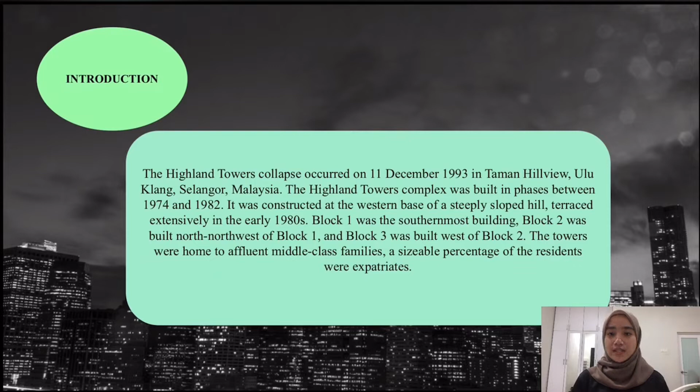On 15 October 1994, 6 residents filed a lawsuit against the developers of Highland Tower and 8 other related parties for alleged negligence. The lawsuit sought more than 1.5 million for loss of property, property damage, rental fees, and funeral expenses. The developers and architectural team were sued for constructing the building without regard for safety.

Furthermore, this has shown the challenge for an engineer to build a building firmly, as the design was made without qualification in mind and was approved by the engineers without knowledge of who designed the plan. Additionally, the construction company was found to have used substandard materials and improper welding procedures during construction.

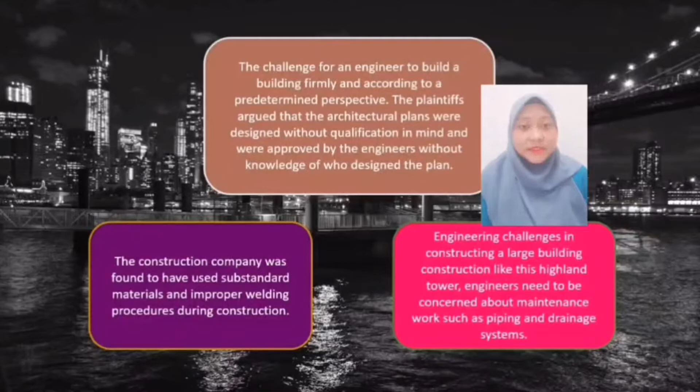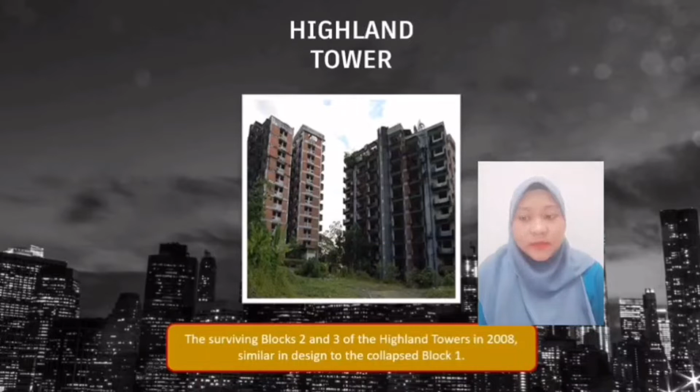Plus, as an engineering challenge in constructing a large building like Highland Tower, engineers need to be concerned about maintenance works such as piping and drainage systems. This is the picture of Highland Tower. It is the surviving Blocks 2 and 3 of the Highland Tower in 2008, similar in design to the collapsed Block 1.

The date of this landslide tragedy was 11 December 1993, which is 28 years ago. The time of the incident was 1:35 p.m., Saturday. The location is Highland Towers, Taman Hillview, Ulu Klang, Selangor, Malaysia. The landslide was caused by continuous rain for 2 weeks.

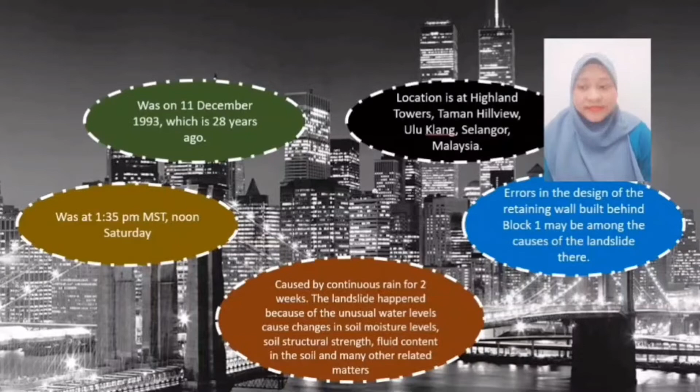Case study at Highland Tower. The surviving Blocks 2 and 3 of the Highland Tower in 2008, similar in design to the collapsed Block 1. The date of this landslide tragedy was 11 December 1993, which is 28 years ago. The time of the incident was 1:35 p.m., Saturday afternoon. The location is Highland Towers, Taman Hillview, Ulu Klang, Selangor. The landslide was caused by continuous rain for 2 weeks.

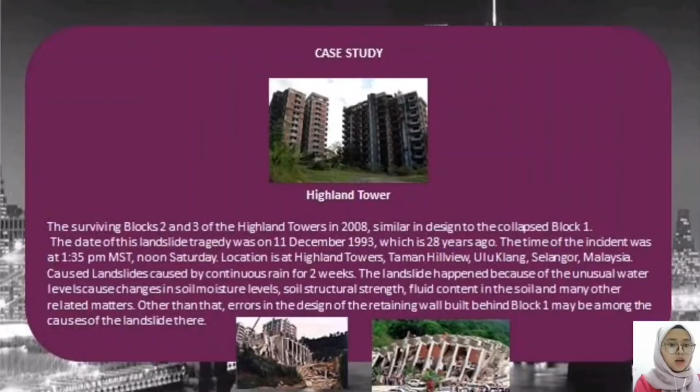The landslide happened because the unusual water level caused changes in soil moisture level, soil structural strength, fluid content in the soil, and many other related matters. Other than that, errors in the design of the retaining wall behind Block 1 may be among the causes of the landslide there. Analysis and discussion.

The monsoon season in Malaysia, namely in November and December, brings extreme heavy rains every year and can cause flash floods and landslides. Block 1 of Highland Tower collapsed after rain fell 10 days in a row, causing landslides after the retaining wall of the condominium parking lot collapsed. Unusual water levels caused changes in soil moisture levels, soil structure strength, balance of fluid content in the soil, and many other matters.

The dense equatorial rainforest fills the Titiwangsa Range with its broad leaves and roots, thus being able to accommodate and receive heavy rainfall and act as a catalyst to the soil. When there are no ground cover crops, water will seep into the soil and become a lubricant to the landslide and the building on it.

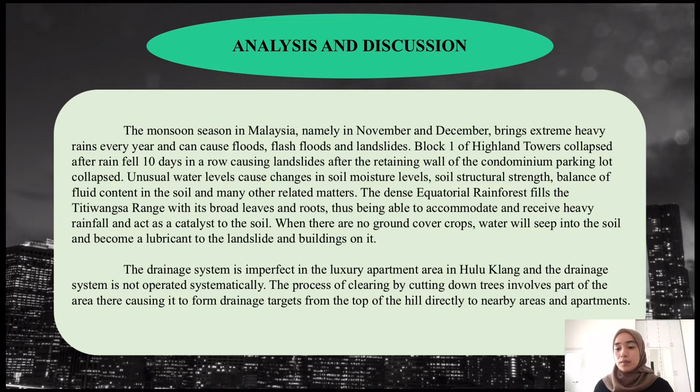The drainage system is imperfect in the luxury apartment area in Hulu Klang, and the drainage system is not operated systematically. The process of clearing by cutting down trees involves part of the area, causing it to form a drainage path from the top of the hill directly to nearby areas and apartments.

In 1992, there was video footage showing water flowing down from a hillside around the Highland Tower condominium during heavy rain. A year before the tragedy, water was pouring from the hillside toward Block C of the condominium and the ground floor of the block's parking lot was covered in mud.

Drains to carry water from sewer pipes on the hillside to the main ditch in front of the Highland Tower block were not constructed. Some people have said that their superiors did not stop the construction of the Highland Towers condominium, even though the developer failed to submit a drainage plan to drain water from the area to Sungai Ulu Klang, the master system to be built for the entire area.

The hilly topography of the area, geological conditions, and unstable soil types also encourage landslides. A geologist from a university stated the soil was not strong rock but a soil mixed with sand. These include Bukit Antarabangsa, Taman Tun Abdul Razak, Taman Hillview, and Bukit Indah. Construction of the building was brisk and there was no slope monitoring by the authorities.

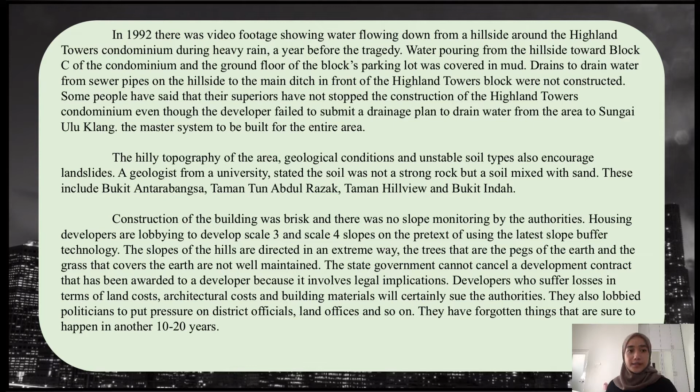The state government cannot cancel a development contract that has been awarded to a developer because it involves legal implications. Developers who suffer losses in terms of land costs, architecture costs, and building materials will certainly sue the authorities. They also lobbied politicians to put pressure on district officials, the land office, and so on. They have forgotten things that are sure to happen in another 10 to 20 years.

Furthermore, there was the approval of an allocation of 89 million ringgit to pay for the cost of acquiring the Highland Towers land from the state government. Then the land on which the 3 blocks are located will become the property of the federal government. Once the money is approved, the process will run and the blocks can be demolished, and after that, development can begin.

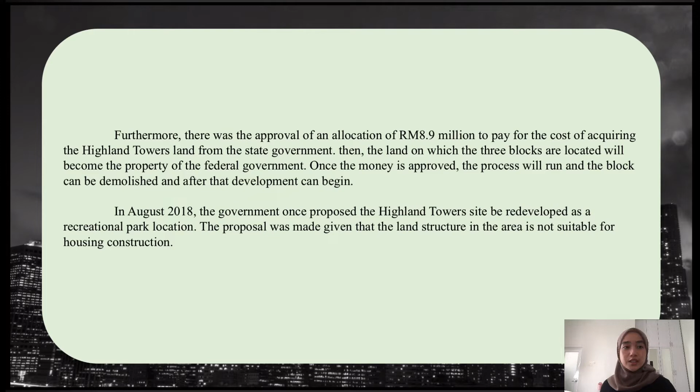In August 2018, the government once proposed the Highland Tower site be redeveloped as a recreational park location. The proposal was made given that the land structure in the area is not suitable for housing construction.

Further investigation. On 11 December 1993, the Highland Tower Block A apartment in Hillview Park, Hulu Klang collapsed at 1:35 p.m. The victim, who lived for 14 years on the 4th floor of Block A of the 12-story condominium, stated he returned from work at 1:30 p.m., 5 minutes before the tragedy occurred.

Next, on 11 December 1993, residents of Blocks B and C of Highland Tower in Taman Hillview, Hulu Kelang, were ordered to vacate their homes due to unsafe conditions. Search and rescue teams from Britain and the United States arrived to help.

On 14 October 1997, the former president of the Pertubuhan Arkitek Malaysia, PAM, told the Kuala Lumpur Coroner's Court that the draftsman of the collapsed Highland Tower apartment was unqualified for a 12-story building. The coroner from the Kuala Lumpur Coroner's Court ruled that the Highland Tower tragedy was not due to any element of crime or natural disaster, but was an accident and injury that befell them after the apartment collapsed.

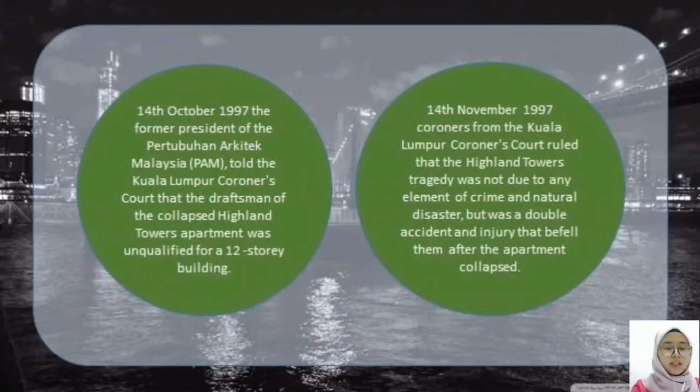On 18 February 2006, the Federal Court unanimously ruled that the Ampang Jaya Municipal Council MPAJ, Gombak District Council MDG, or any local government have the immunity and protection of Section 95(2) of the Street, Drainage and Building Act 1974 from any claim before the collapse. Some parties decided MPAJ was not responsible for the loss before and after the condominium collapsed.

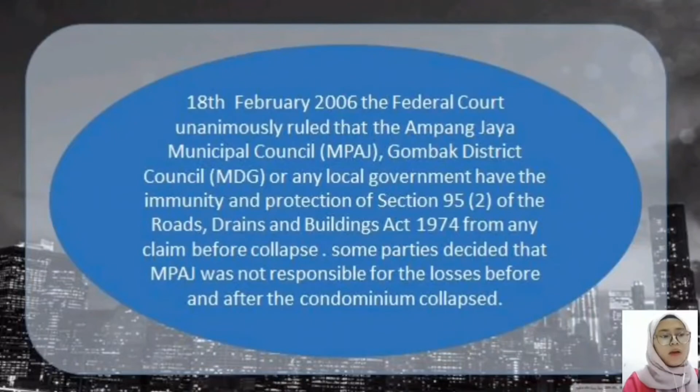Risk slope areas throughout the country are now the main focus of all parties. Most developers across the country are instructed to take precautionary measures to prevent landslides from occurring at their construction sites, especially for projects on high risk slopes and hills such as Highland Towers, whose areas are on high ground.

Construction of the building is brisk and there is no slope monitoring by the municipal council. The slopes of the hills are directed in an extreme way. The trees that are the pegs of the earth and the grass that covers the earth are not well maintained.

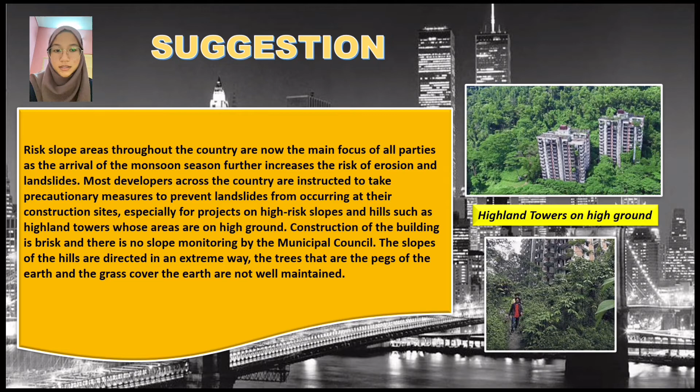The actions that need to be taken to deal with disasters such as landslides are that the Ministry of Works needs to work with the Meteorological Department to develop a landslide early warning system to prevent the possibility of any life-threatening disasters during the monsoon seasons.

This is because the monsoon in Malaysia, which is November and December, brings extreme heavy rains every year and can cause floods, flash floods, and landslides. Block 1 of Highland Towers collapsed after rain that fell 10 days in a row caused landslides after the retaining wall of the condominium car park collapsed.

The Public Works Department also needs to discuss with the National Security Council, which is MKN, and the Malaysian Civil Defence Department (JPAM) regarding emergency response during natural disasters. Also, other actions that can be taken are that when it rains, some signs that need to be noted include brown water flowing from the hill or the presence of rocks on the ground.

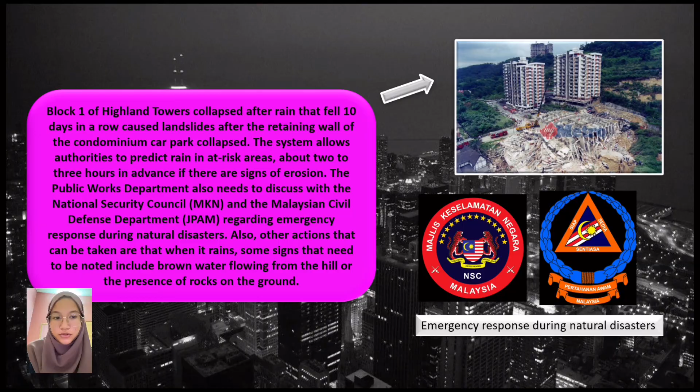The responsible party needs to take a role to solve this landslide problem because it is now an acute problem for our country. Landslide problems like in Highland Tower often occur in other places as well, especially in hilly areas.

So, another suggestion that can be considered for overcoming the problem of landslides in Highland Tower is to make a larger drainage system to suit the size of the building being built. A larger drainage system can help smooth the flow of water quickly.

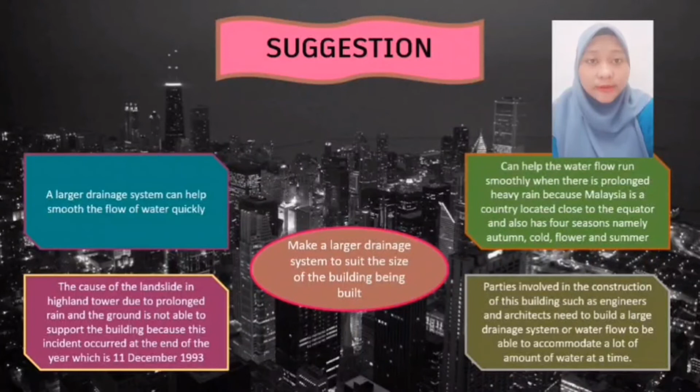This can help the water flow run smoothly when there is prolonged heavy rain because Malaysia is a country located close to the equator and also has 4 seasons, namely autumn, cold, flower and summer. As is well known, every year Malaysia will experience heavy and prolonged rains resulting in floods.

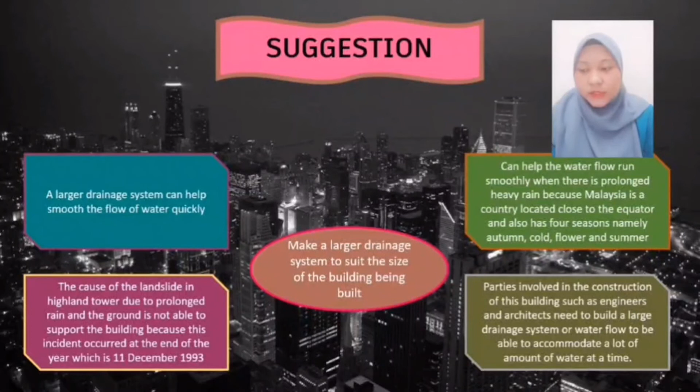So, this is clearly the cause of the landslide in Highland Tower: prolonged rain, and the ground was not able to support the building, because this incident occurred at the end of the year, on 11 December 1993. Therefore, parties involved in the construction of this building, such as engineers and architects, need to build a large drainage system or water flow to be able to accommodate a large amount of water at a time.

Next, we can also plant plants or green trees around the building to accommodate or support the building structure. This is because the function of the roots of each tree is to grip the soil. Indirectly, it can also shape the ecological integrity of an area. So, with this, we can control soil erosion that may occur.

In addition, the authorities need to perform maintenance of the building structure at least 3 months after the building is complete to review the usability or impact of the use of each structure, whether it is suitable or inappropriate. For example, the drainage system and the retaining wall structure, so that we can improve weaknesses.

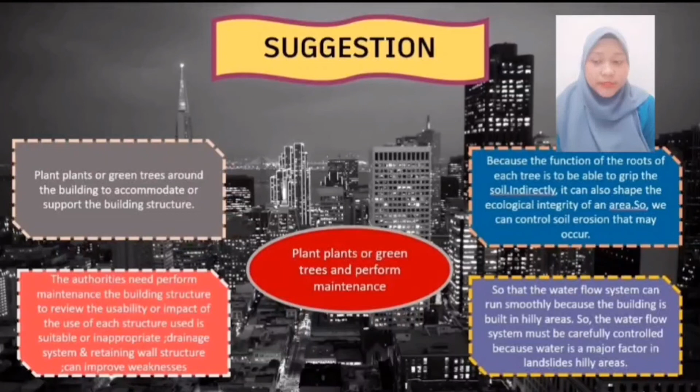Therefore, every year, we also need to do maintenance of the building structure, such as cleaning the drainage system so that the water flow system can run smoothly because the building is built in hilly areas. So, the water flow system must be carefully controlled because water is a major factor in landslides in hilly areas.

In conclusion, from this case study of the Highland Tower building, we can find out about the cause of the landslide tragedy that occurred there. There are some problems in maintenance and geology that are not the responsibility of the relevant parties. With this problem, there were a variety of tragic injuries and deaths.